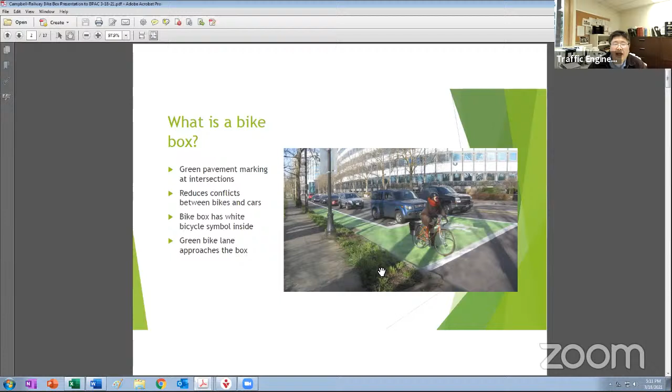Here's some of the reasons why we're using a bike box at Campbell and Railway - really for safety and visibility.

So we got this idea of putting a bike box at Campbell Railway. It was part of a study we called the Campbell PDA - well, Transportation Improvement Plan for the Campbell Priority Development Area. It's quite a mouthful, but if you take TIP and add the C, it's 'tipsy.'

One of the concepts shows a bike box at this intersection of Campbell and Railway, with sharrows going through. The feedback we got from when we were doing this study was that it was difficult for folks headed westbound on Campbell Avenue to remain on Campbell Avenue.

So the consultant for this project prepared this concept. We went along with this portion, the green bike lane leading to the bike box. However, the green-backed sharrows - we decided to just keep them as regular sharrows, because green-backed sharrows, the sharrows with the green background, is what they call an experimental device. It isn't yet approved for use on the public street. Rather than having to go through all the hoops of applying for permission to do a study to see how these things work, we went with regular sharrows.

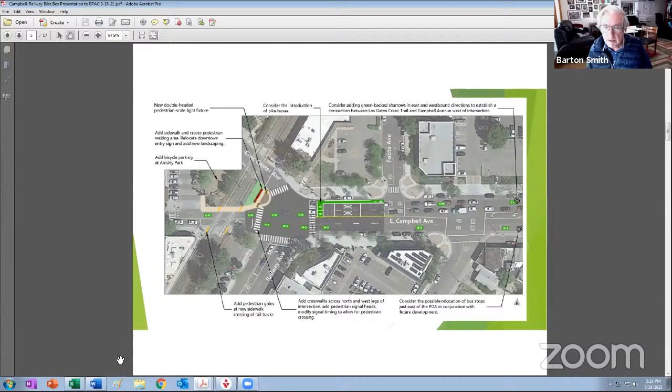I'll open up Google Earth so we can see more of what we're describing. I'm referring to the area directly in front of the park, like where the basketball courts are.

One of the main constraints is the overall right of way along that stretch, and one of the big bottlenecks is the bridge that goes over the creek. Is that bridge 50 years old, or whenever it was built? We widened it some time ago and made a little bit of room, but still not quite enough.

I don't understand why the bridge can be striped, but the striping ends and then begins once you get onto the bridge traveling east. You'll bike in front of the park and then all of a sudden a bike lane appears, but for that section between Gilman and the bridge, there's nothing there. I almost feel like you could just extend the striping that's on the bridge to Gilman.

Before I measure the street, this is the development I was talking about, the Graylands property, on the northwest corner of Campbell and Poplar. But I guess your concern is this stretch leading to Campbell Park. Yeah, even just that stretch where the trees are in front of the basketball courts, less so in front of that future mixed-use development, but what's directly in front of the park itself.

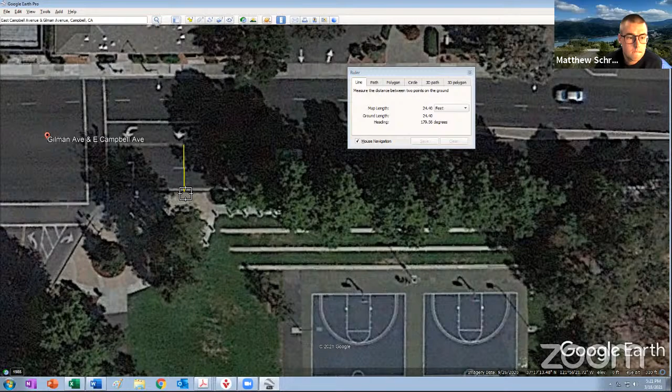24 feet, let's see, 4 feet. As Matthew is measuring this, we should also point out the frontage directly in front of the park there. I think I understand what you're getting at.

The difference is that intersection essentially has a fifth lane, which is the left turn pocket to go from westbound Campbell Avenue onto Gilman. So you're essentially taking up 5 lanes of traffic there at the intersection, whereas closer to the bridge you don't have a full 5 lanes, you're back down to 4 travel lanes. So squeezing in that left turn pocket creates more of a constraint on the edges, it kind of pushes everything out a little bit.

Okay, I understand what Matt's saying, he's concerned about the eastbound direction. It's approximately 24 feet. Suppose you could have two 10-foot lanes, then you really need 5 feet for a bike lane, so we're just looking for 1 more foot. How wide is the turn pocket?

Hang on a second. We also have to make room so that we don't run into the raised median island. Let's see how wide this is. If it is 11 feet, we could possibly narrow it to 10 feet.

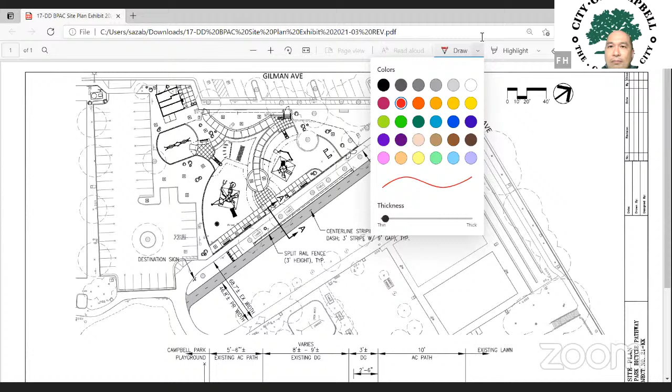So the original path is here, and it kind of just goes straight through. The playground project will be taking part of that existing path in order to extend its footprint. But what's remaining is that we're going to build a new path to really focus the user in terms of where they're going. So one of the things we have to do is somehow connect the two paths.

Last time, the original concept has the fork a bit more, if I can maybe clean this up a little bit. Come on, it's not working. Let me zoom in for you here. Might be a little better.

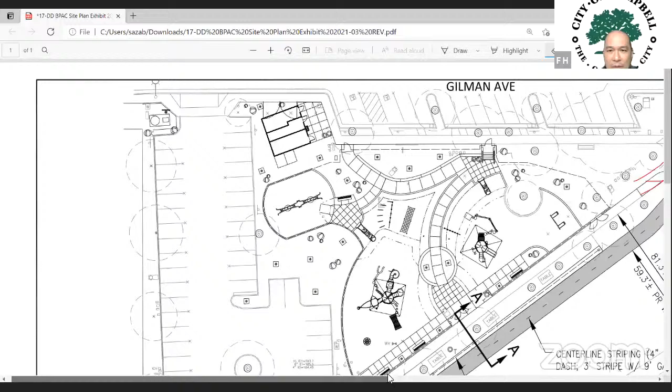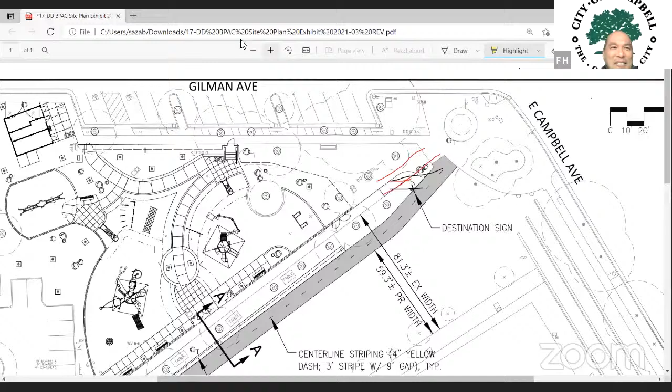So last time we were here. Oh, that didn't work. So last time we were here, the original concept had the path kind of forks out. It was pointed out that maybe that's not ideal, and so we've gone back. Really, the erase doesn't work at all. We've gone back and came up with... Brett, yeah, what if you press, is there like an undo button? Yeah, it doesn't. But let me see if I can. Yeah, I can. So that might be better.

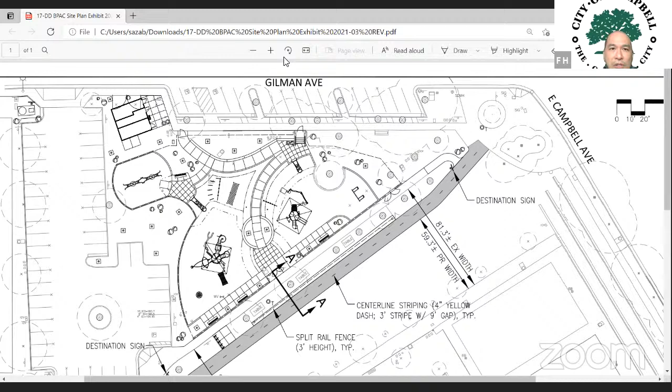So what happens now is that the junction of the two paths is now more of a right angle, and you see the signs here at the northern end and also at the southern end. We still have to work on exactly what it'll look like, but the idea is to use destination signs, meaning if someone's standing right here, biking, and their destination is the playground, the sign would have arrows pointing to playground versus to Creek Trail.

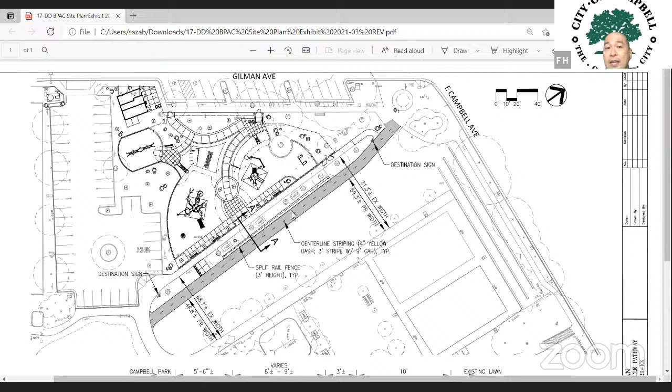So it's more destination oriented and directs people that way. The other comment taken last time was that the clearance between the edge of the new path and the proposed fencing that would separate the picnic area and the new path. So I'll scroll down here a little bit, and this shows it where here's to the left of this...

So let me just repeat. One of the comments taken last time was that anything adjacent to the new path needs to have certain clearance. So one of the things we're putting in is a fence separating the existing picnic area and the new path. This cross section is as if someone's standing on the path looking toward Campbell Avenue. To the left, not shown on this cross section, is the playground area. This dashed grayed out T's are the representation of the existing picnic table and benches. This solid vertical line work is the new fence we're going to be putting in, and we're keeping a 2.5 foot center to edge of the pathway.

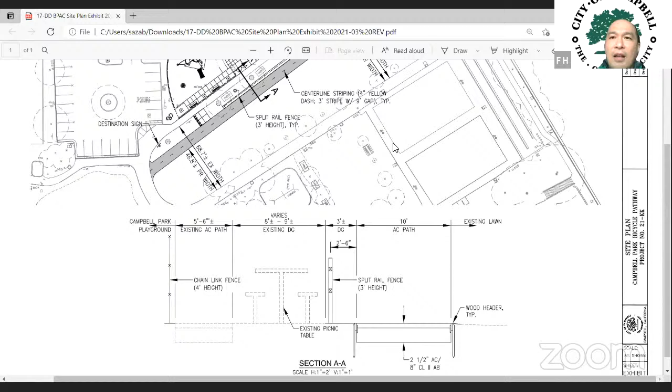So I think last time we talked about wanting a minimum of 2 feet, so we're going to try to provide that here. The other comment from last time is, and it's a little small here, but this dashed line is that new fence I just talked about. The original concept has one or maybe two openings along this fence, and it was proposed to be a shorter chain link fence. So the comment then was, do we really have good visibility with that type of fencing? What about kids coming out in these openings presenting a visibility challenge for bikes or pedestrians already on the path?

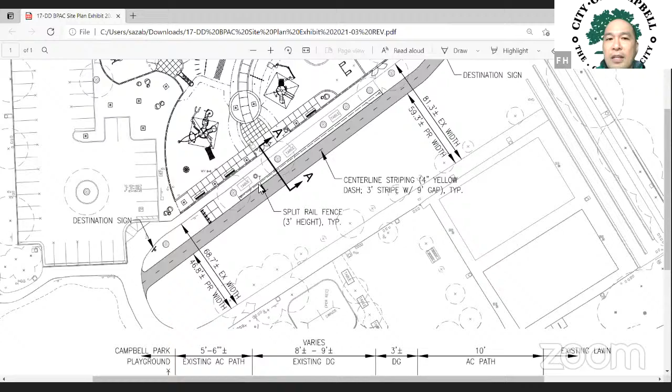So here, instead of that chain link fence, first of all we've eliminated the opening along the fence line. Secondly, we're going to use a split rail fence—basically pieces of wood, kind of like a white picket fence, but more appropriately a wood split rail fence. If you're familiar with the Perc Pond on Winchester near Hacienda, that type of wood fencing is kind of what we're envisioning here.

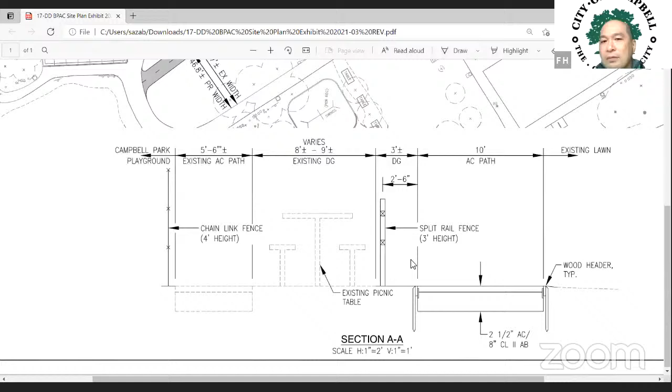So hopefully that should provide the visibility and also make sure anyone who wants to cross the path would have to go around and really be careful about what they do before they do it. So another element that was pointed out to us was, well, how do we, even though this is not a bike path, help channelize the movement a little bit?

So we're going to be putting in a yellow dash stripe, I think a 9-foot gap and 3-foot yellow striping down the middle, just to give some kind of guidance for people.

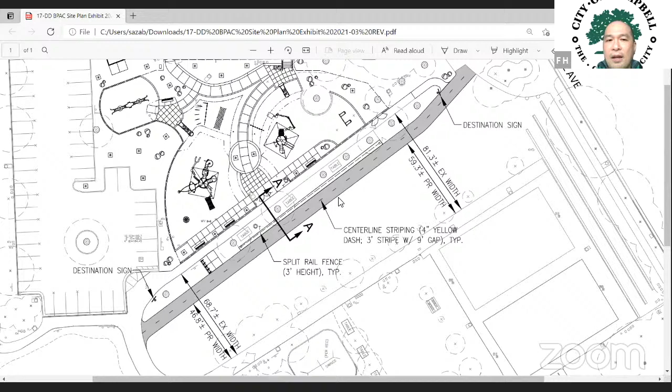The other change we made is, last time as a concept we were proposing an 8-foot wide path. We're going to do a 10-foot path. That adds to the clearance and the buffer zone and elbow room for everybody using the trail and around the path.

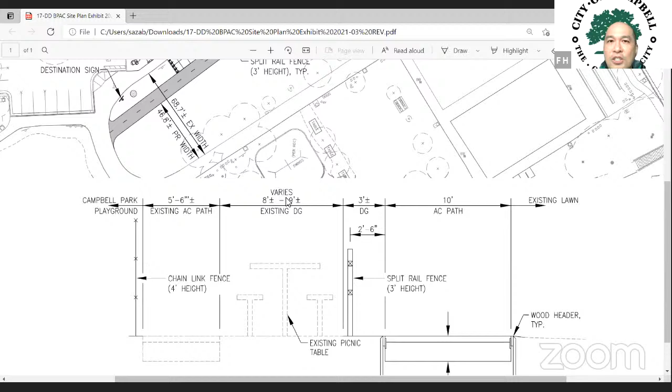So these are the changes we made since last time, taking into account your comments. Timing wise, the intent is to have this path put in before the playground project takes over the construction site, and this new path will remain open during the playground construction timeframe. So that's the update, and we welcome any comments and questions you may have.

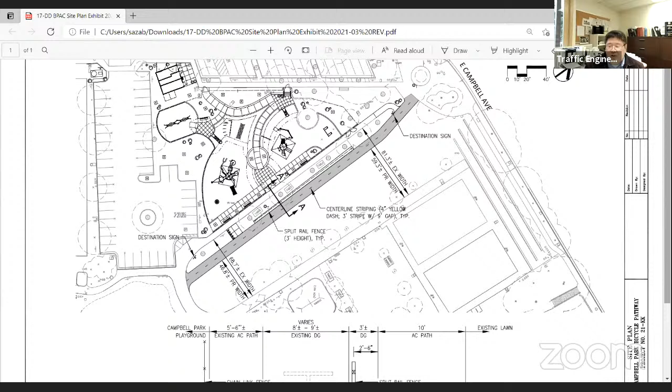So I heard two things that the BPAC should hear. One, to answer Carmen's question from last time, Todd was correct, they're both mixed use. The second thing is the signs will change. Instead of trying to brainstorm well, this trail is for bikes, this one's not, we're going to change the message to say: if you want to go to the picnic area, follow this arrow one way; if you want to go to the creek trail, go the other way. So it's based on destination, not on what type of mode you're using.

I've got a question. What are the 4 boxes just south of where the picnic tables are? That's actually going to be part of the playground project, they're going to put in some bike racks, a dedicated area so people can put their bikes there.

Just want to make sure there's plenty of clearance to the trail. That's all I have. So now that we've finalized the path, we're going to go back and talk to the playground guys and say, okay, you need to make some adjustment on that end.

Okay, good. No, it looks better. I like it.

Yeah, and seeing the, I don't even know what you call it, but like the little bulb-out at the top where it's no longer coming in like a straight fork funneling people up there, that change almost eliminates the need for the sign. I mean, I get that you want people directed to the park, but now cyclists aren't going to get confused on which path they should use. So I almost feel like there's no need to include a sign there because it's so obvious that that's the route to the playground.

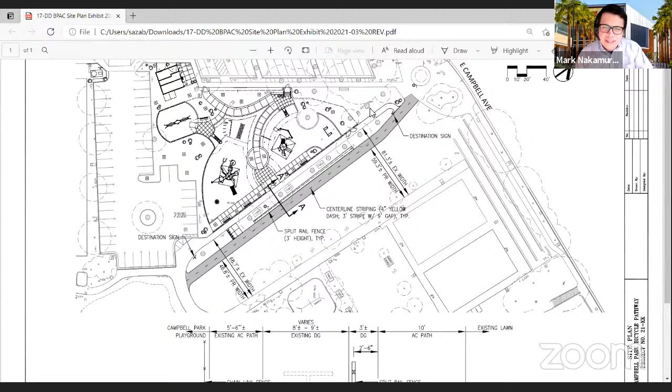Yeah, I was going to add that I also like the changes. Just one question about the fence: it looks like it's just along the picnic areas and doesn't really extend the entire length of the path. And will there also be trees, like those circular items there? Are those trees there too?

Yeah, those are the existing trees. We're trying to make sure that we don't impact any of the existing mature trees that are out there unless we absolutely have to.

The reason the fence only goes along the existing picnic area is what we're envisioning: folks that are families using the playground and picnic area are the people that might want to cross the path for whatever reason, and we want to discourage that. Once you pass that area, there's really no place to congregate, so that's why the fence is only along that area. Okay, yeah, I think it looks really good.

Okay, thank you for your comments. So what will happen from now is we'll work with the maintenance yard crew and work out a schedule to see exactly when they can have this work done. Once we have a good schedule, we'll come back and report to you folks for your information.

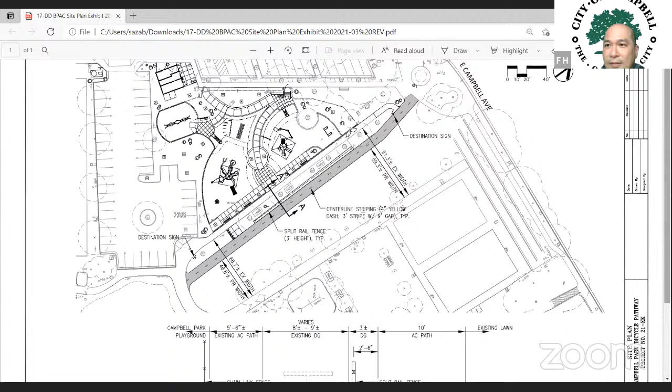The next item on the agenda is the Harriet Avenue Sidewalk project. What I heard from you earlier was that the 30% design is under review by staff. Is that correct? That's correct. So there isn't much to discuss except we're in the process of designing and it's early in the process. This is the portion of older Harriet Avenue near Westmont High School, south of Westmont Avenue.

Item 4D is the annual pavement maintenance project. That's the project where we were exploring putting in sharrows on West Latimer. Fred, you'd mentioned the project was scheduled for council's approval this past Tuesday. Yes, the council did approve that project to move forward, authorizing us to bid that project out. The project does contain the work Matthew mentioned about the 2nd Street and Orchard City Drive intersection, the RFB improvements that's going in.

We will be advertising starting next week, and the timeline would probably be something like May. We hope to get the contractor out in the field to start doing work. This type of project typically takes a while because first we have to do all the concrete improvements, like curb ramps and things like that we require to put in. The paving itself, the resurfacing, will probably happen more toward the June and July timeframe. So that's kind of what we anticipate.

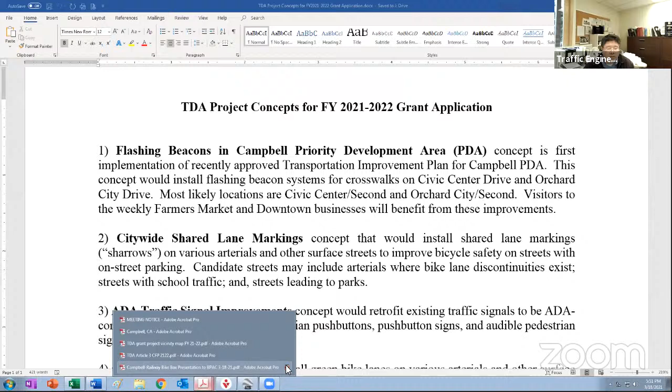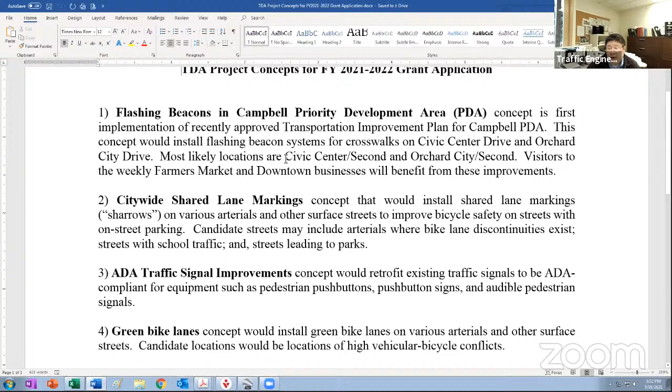Last year's grant application included the bike box as part of this description, but since we finished that, I eliminated it. We want the flexibility to use these funds to install sharrows wherever, so we're not limited to a specific location.

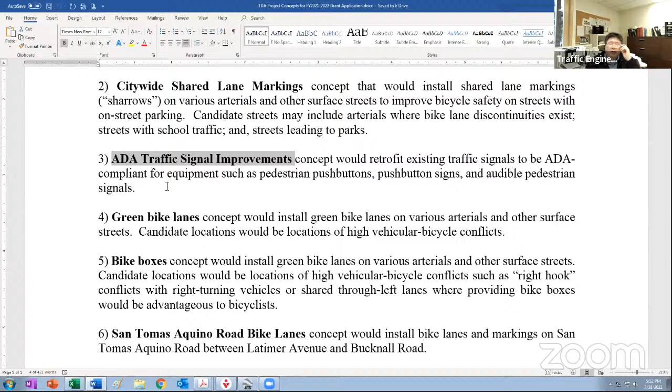Also, there are times we get requests for retrofitting our existing traffic signals for ADA purposes. I believe all our pedestrian push buttons in the city are now the 2-inch type that are easy to press. But if we receive requests like that, or for an audible pedestrian signal from someone who's sight impaired, there is a funding source for that. If we want to restripe bike lanes anywhere or add a bike box, we just wanted that flexibility included as part of being eligible for using the TDA funds.

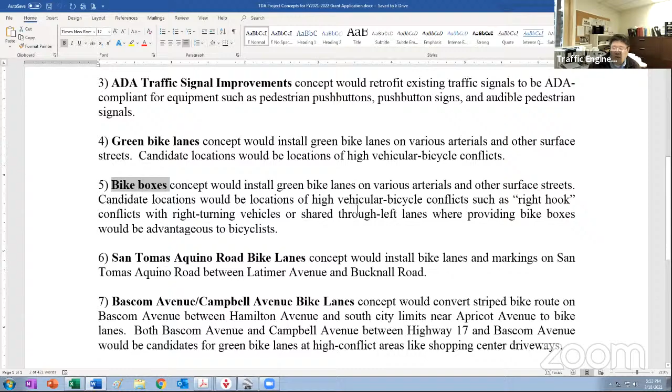San Tomas Aquino Road bike lanes. A couple of years ago, the city of San Jose approached us about a portion of San Tomas Aquino Road. They had ideas for a road diet north of Campbell, and then they were going to conform to the existing conditions around Hamilton Avenue. We were exploring adding bike lanes on both sides of San Tomas Aquino Road between our north city limits near Latimer Avenue, continuing all the way down to Bucknell Road, to our city limit. So that's probably the extent of what we have in Campbell on San Tomas Aquino Road. We believe we can squeeze in those bike lanes - really it would be a striping project. So that's included.

I love that because the work San Jose did north of Hamilton is fabulous. There was a huge improvement after they made those changes. So fully supportive of that.

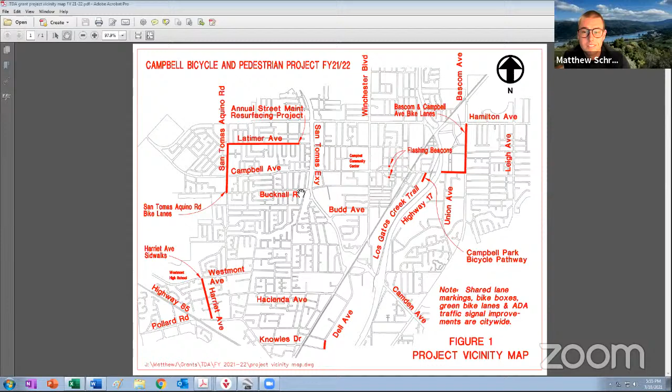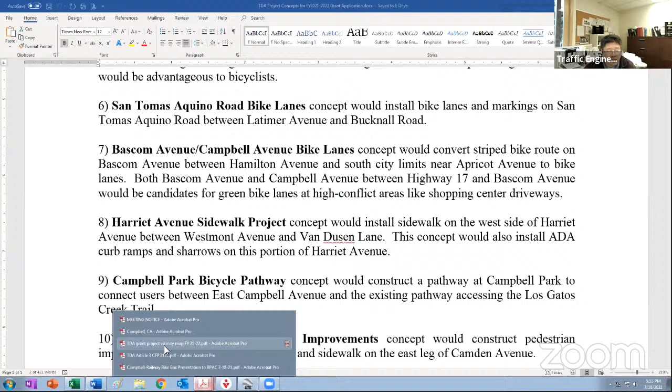The next item is Bascom Avenue and Campbell Avenue bike lanes. We did receive some developer fees to install green bike lanes adjacent to the Pruneyard. What we're thinking eventually, though it may or may not be part of this grant allocation, is to convert the striped shoulders we currently have with a white edge line into bike lanes on Bascom between Hamilton - to tell you the truth, it could go all the way down to a little bit past Apricot Avenue to our south city limit. But the portion that's at least funded with developer fees from the Pruneyard includes the portion next to the Pruneyard - Campbell Avenue and then Bascom Avenue. I might modify this map.

We talked about Harriet Avenue sidewalks, but let me show you what I was trying to describe. Westmont High School is towards the southwest portion of the city, and this portion, some people call it Old Harriet Avenue, is very narrow in some places and missing sidewalk, especially on the west side of the street. That's the side we'll be installing sidewalk on.

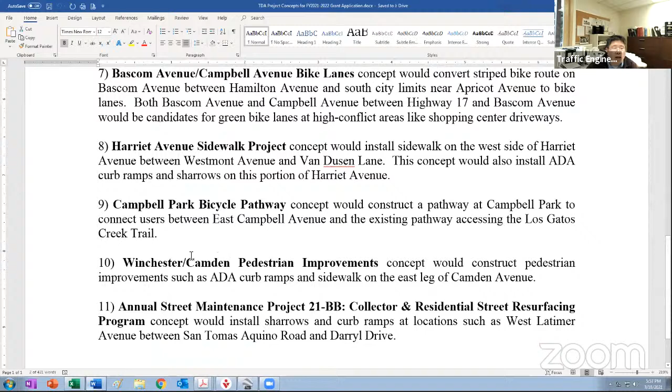Fred just described the Campbell Park pathway. This item kind of came up recently - it doesn't show up on our map yet, but I can show you where it is. It's the intersection of Winchester and Camden. There's an issue there.

I'm going to go to Google Street View. Right here, by the way - oh, this is old, it doesn't show our bike lane going through here, but this corner...

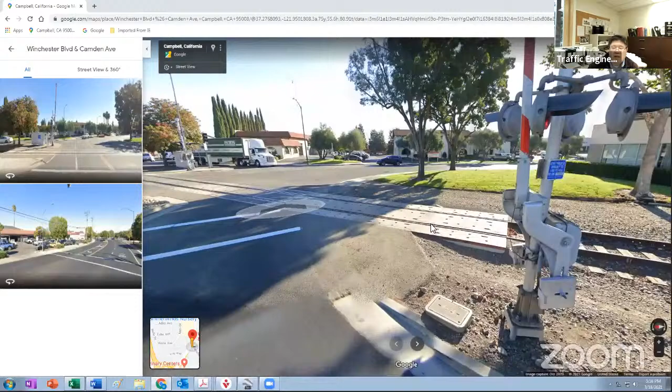It's kind of questionable. We've been approached by VTA for a different purpose - it was addressing where vehicles should stop ahead of this railroad gate that descends. When we were approached by VTA about that concern, we also looked here, in that it's kind of odd - an odd design having a crosswalk go right into railroad tracks. So it's not really clear what will be required, because as we move along addressing VTA's concern, the California Public Utilities Commission, the PUC, will become involved - they have authority over at-grade crossings, and we'll hear from them what they feel needs to be done to upgrade this corner. So it's kind of a pedestrian issue as well.

So I just wanted to include that concept just in case. We've approached - well, we have asked VTA, and they had some recommendations, mentioning a similar kind of project they had in Sunnyvale. For that project, they took the lead in installing the improvements. So we're hoping VTA can take the lead on this one as well, but it's no guarantee, and that's why we wanted to at least set aside the TDA funds in case there's a need for funding.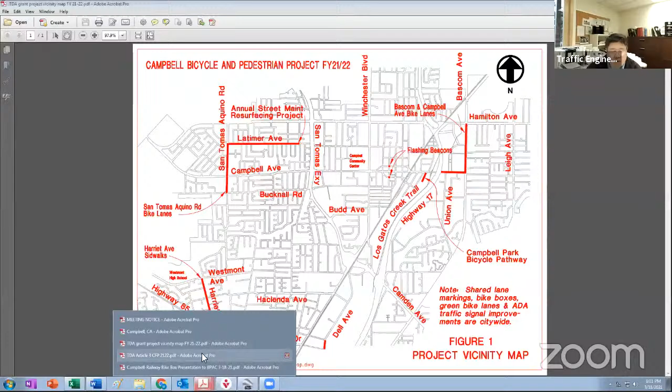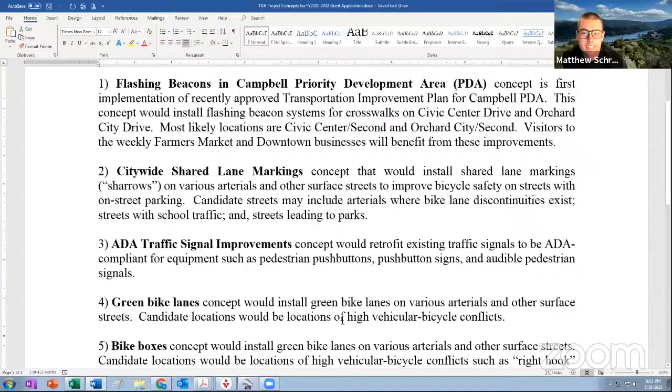It'd be nice if those bike lane improvements could continue on Bascom all the way to Dry Creek. That would be really excellent. But I don't know if that's possible.

Okay, and I was just curious if there's any plan to address the sidewalk over near the Garrett. What is that? Campisi and Creekside, where it's sunken about 5 feet. So I was just curious what's going on with that.

I'm gonna ask Todd if he could jump in. It's a problem, it really is a problem. Apparently the street was built on landfill, and so it's always been sinking, and I'm not sure what it would take, aside from rebuilding the street on a bridge, or maybe Fred could answer that as well.

I'll jump in first, and I'm sure Fred can help correct me at some point. As Matthew said, that is essentially a closed landfill site. And so we've had some pretty significant issues with the roadway section of Campisi over the years.

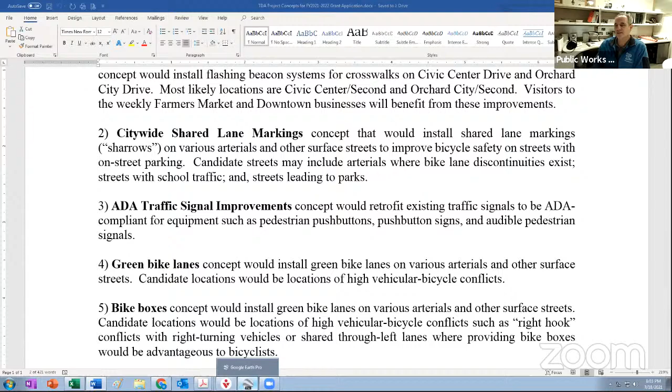If you can recall back a few years, the end of Campisi that's maybe a little closer to the Pruneyard had a pretty significant dip in it a few years ago. We actually went in there and did some reconstruction of the asphalt section to match the concrete section, because there's supposed to be a smoother transition there. So we were able to take care of the roadway section.

And you'll note that as you get closer on Campisi to Creekside, that section of roadway is essentially built as a bridge. So that's why that section doesn't really sink anymore, because it's essentially a concrete deck. Unfortunately, well, fortunately first, the sidewalk on the south side was really constructed as part of that bridge deck, so that one really is not sinking to any great extent.

We're actually working separately with the property owner on some interest they have in reconstructing their parking lot, because if you look, it's not just our sidewalk, but it's their parking lot as well. That's really up and down all over the place. And cars, I think, have difficulty actually getting in and out of the parking lot because there's such a drastic drop off with that driveway.